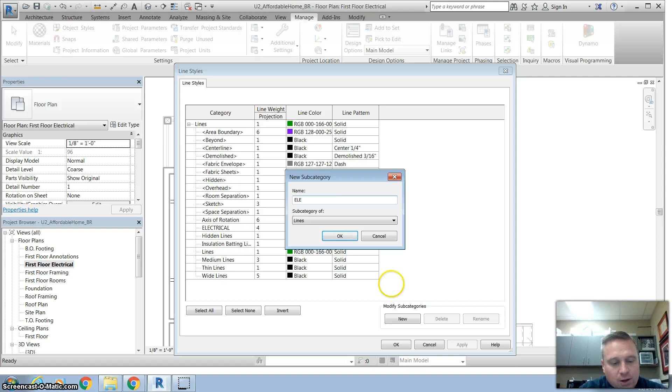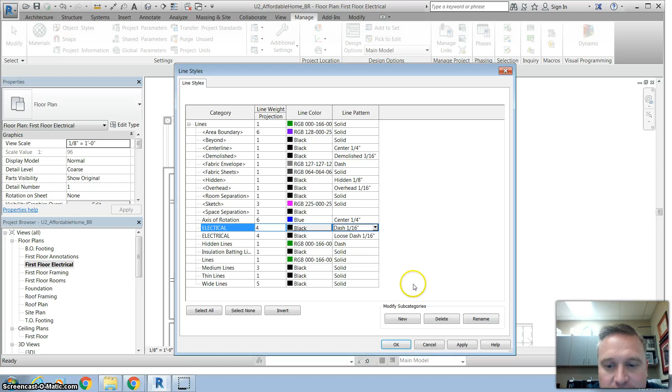You're going to click that you want to make a new line style, and you're going to call it Electrical. And you're going to want to put that in all caps so it's easy to find later. Once you have your line style category, you're going to want to change the line weight projection to 4, and you're going to want to change the line pattern from solid to dash 1/16, and then you can hit apply.

And OK. Now, when you're annotating, putting in the wires for your lines, you're going to go to Annotate. On Annotate, you're going to click Detail Line, and you're going to click under Line Style. You're going to choose your electrical line style that you created. When you put in your electrical wires, we are going to use a start-end radius for that, and so you'll click on that line type.

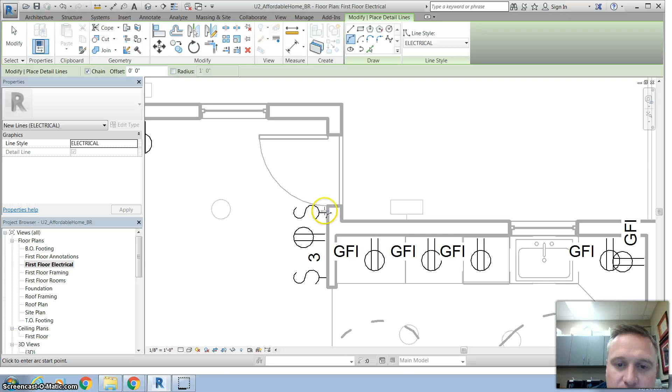And when you put them in, you can zoom into your switch, and basically we're going to say that this switch right here controls this light. So I'm going to click, and then I'm going to draw an arc. And you want to draw your arc so that it doesn't interfere with the other elements of your design.

The other part of this circuit is hooked to our other outdoor light as well. And so I'm going to click on that, and I'm going to draw again another arc so it doesn't interfere with the other line types. And so when I'm done with that, I can go ahead and hit escape. And now I'm saying that when I turn on this switch, it's going to power this light, and these two lights are in series together.

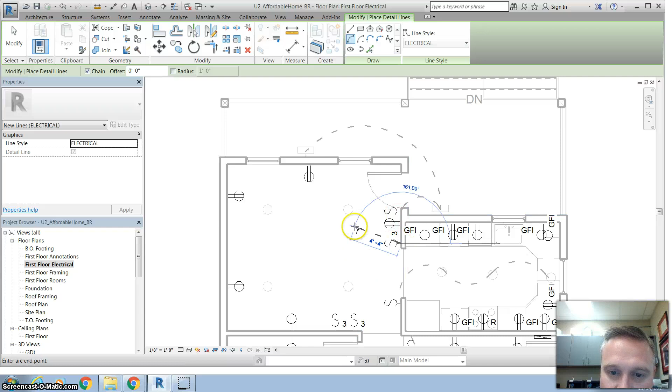The other type of switch you're going to have and control is anywhere, like we talked about earlier, you have 2 rooms or 2 entryways, and you want to control the lights with 2 switches. You're going to use a 3-way switch. And so I'm going to draw the wire from the switch to the first light, to the next light,

to my third light. I'm trying to position this so that the wire goes to the center of the light fixture, and also so that I rotate those arcs that I'm creating, so one goes one direction and the other goes the other direction. And sometimes that's an easy way to manage those switches.

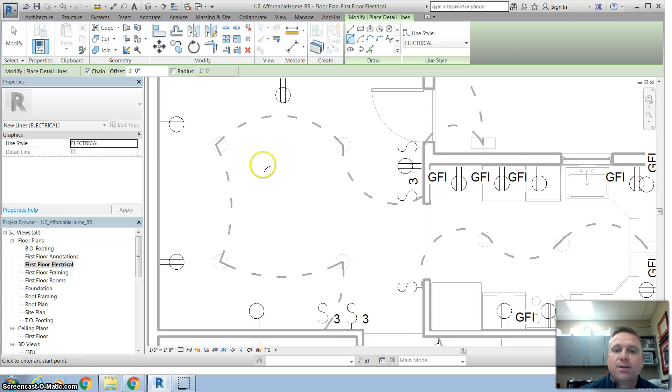Oops, I connected it to the wrong point, so I want it to be to this 3-way switch here. So I'm going to connect that back right like that, and so that takes care of the lighting of the living room here. I have one more that I want to do in the hallway. So again, I'll click to start it, draw my arc, first arc, connect it to the second light

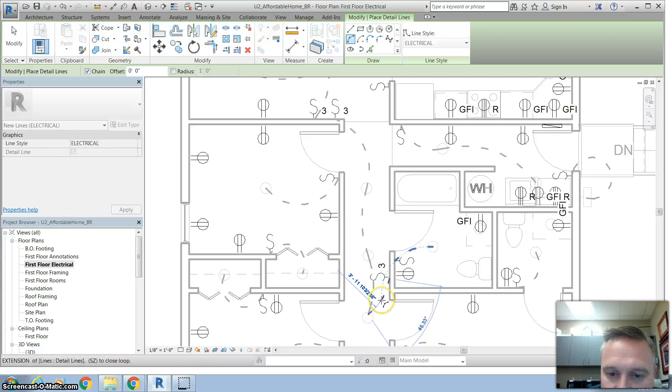in my plan, and then connect it to the third light in my plan, and then back to the other switch. So when you have all of your wires in, you'll have a finished plan that looks like this. Remember, we're just drawing the wires from the switches to the lights to show how those circuits work. Don't forget to include closets.

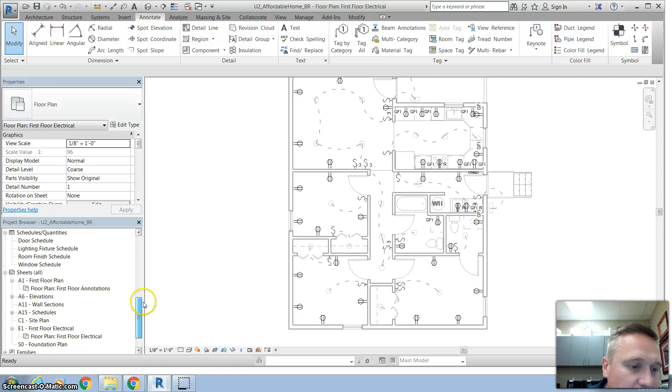When you're done with that, you can go ahead and place your electrical plan on your sheet set inside of first floor electrical. And so you might have to organize your views, but you should have something that looks like this for your electrical.